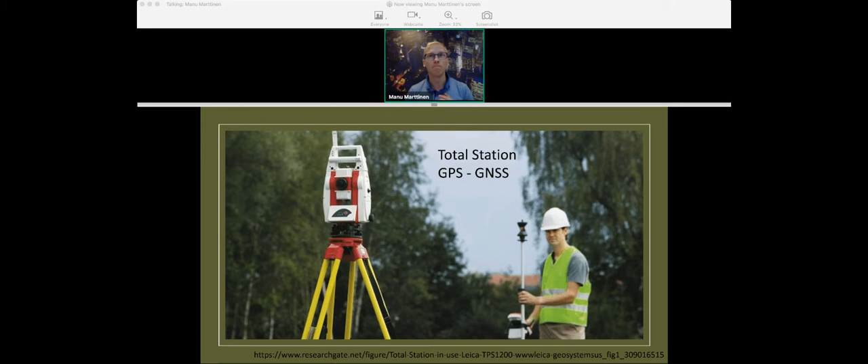But then they noticed that, hey, we have to walk a lot. Previously, the assistant guy like me was walking and they were just standing by and watching with the binoculars. But now they had to walk a lot. So they thought, wouldn't this be possible to do some other way? Maybe not all measurements, but some of them, especially those where you have to travel long distances.

So then we come to drones and how you can use the drone, orthophotos, 360 photos, and what kind of measurements you can do with drone technology on your infra construction site. And that is our topic today: Infrakit and drone with 360 photos in a highway project.

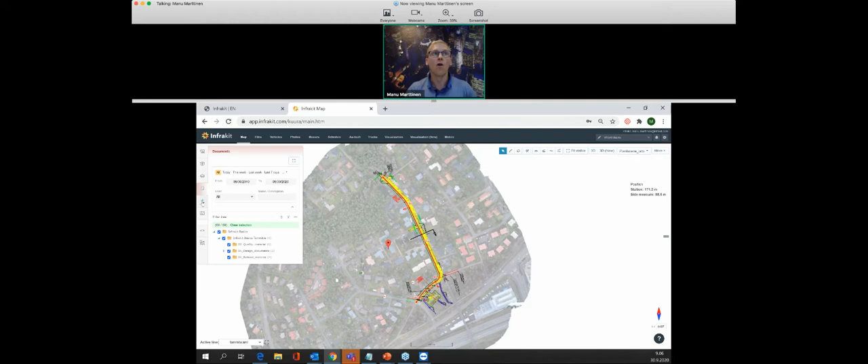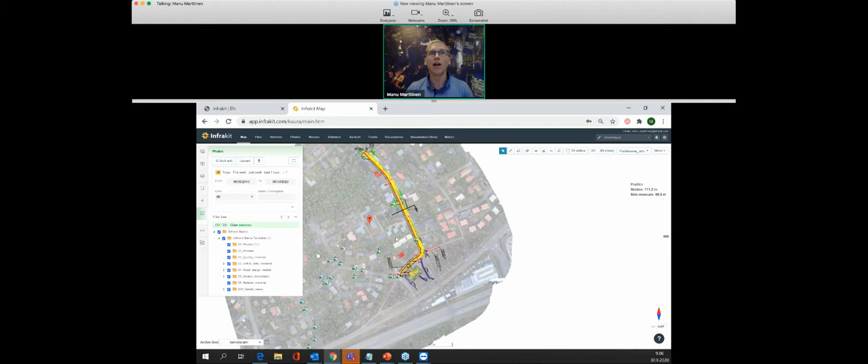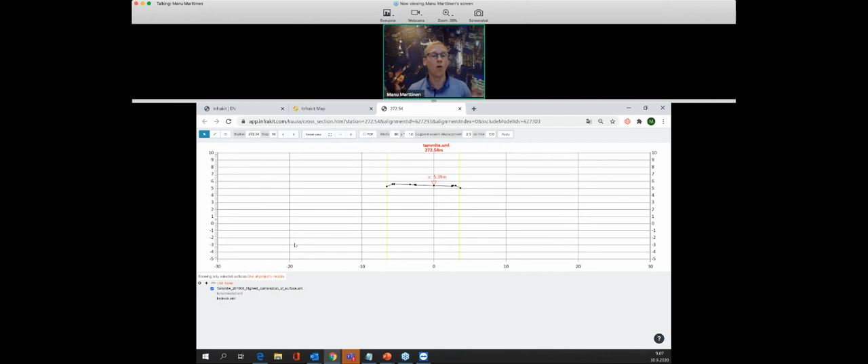And of course, you can see there all the documents that have been imported to your project, all the as-built points, and all the images. So basically, you can handle all material related to your infra project in Infrakit. And if you need, for example, to take a cross-section, you can draw it anywhere related to your alignment, or if you don't have an alignment, anywhere you want. And you can also do some measurements from the cross-section, for example this excavation depth and height.

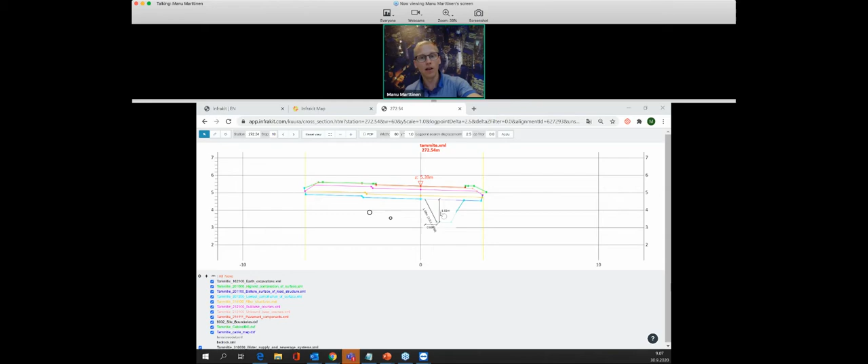And that's not all; the related information is also in your tablet computer. You can use it with your mobile devices, with your phone, or with your tablet, and set there all the needed information as well. For example, here I put one highest combination of model and one alignment, and I can take the cross-section here as well. All the information you need to do your infra construction business is in your pocket with your tablet computer. So that's Infrakit in a nutshell.

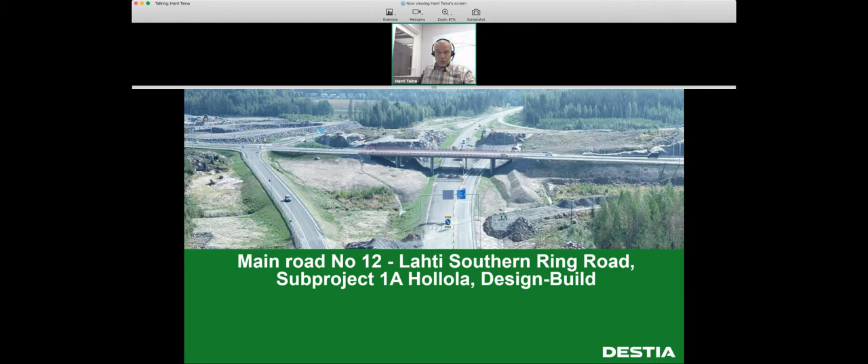So here you can see the old road. If you go to, for example, Jyväskylä or Kouvola or Lappeenranta, you are going this road now, but after it will be opened somewhere at the beginning of December maybe. So this is our part starting from Soramäki Interchange, and it ends here a little bit after Okeroinen Interchange.

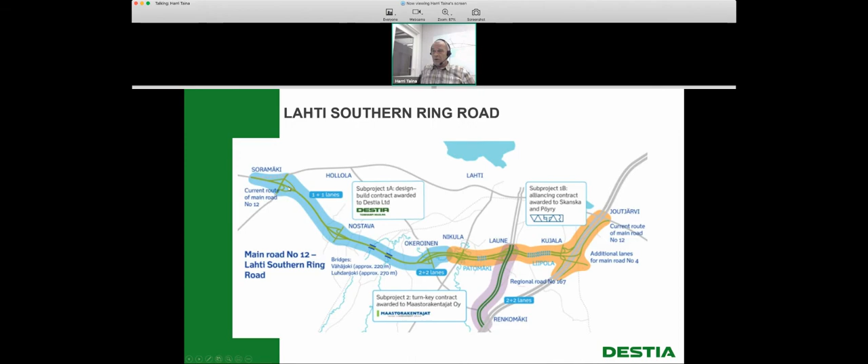And this part, they are with Skanska and Pöyry, and they have an alliance contract. And our part is ready now, but they are still fixing some things. So after they have finished in the beginning of December, we can get the traffic to the new road there. And then our part here, you can see these are the 3 interchanges we built.

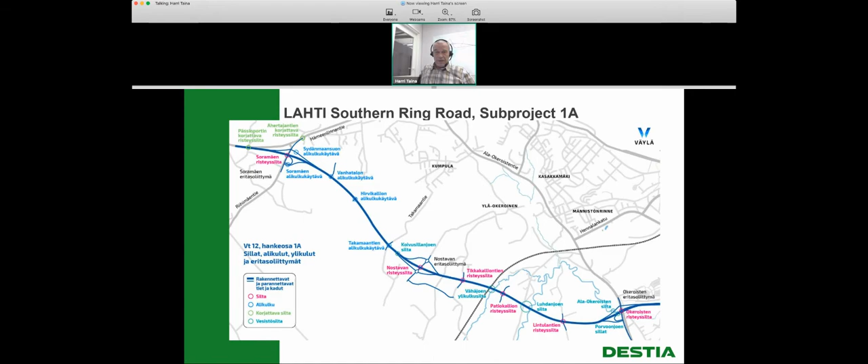And then there are these 2, Bridge Vähäjoki and Bridge Luhdanjoki, that were the biggest or longest bridges we built. And some background. So the client is the Finnish Transport Infrastructure Agency, and part of the costs go to the city of Lahti and Hollola. They are paying some quarter of the costs, and we started the actual construction at the beginning of April, and

now we finished. It was about 2 or 3 weeks ago when we finished the building, so it was quite well in the schedule. And here are some numbers of the project. So it's a little bit under 9 kilometers, and the last kilometer is 2 + 1. So it's a motorway, motorway 2 lanes there, and then the 3 new interchanges and 18 new bridges.

And the biggest bridges were Vähäjoki S7, 230 meters, and S9 Luhdanjoki, 280 meters. And here are some numbers from the beginning of the building of the project. There were quite a lot of pile slabs also at the end of the roads in the Okeroinen Interchange, and about 100 kilometers of piles we had to put in the ground.

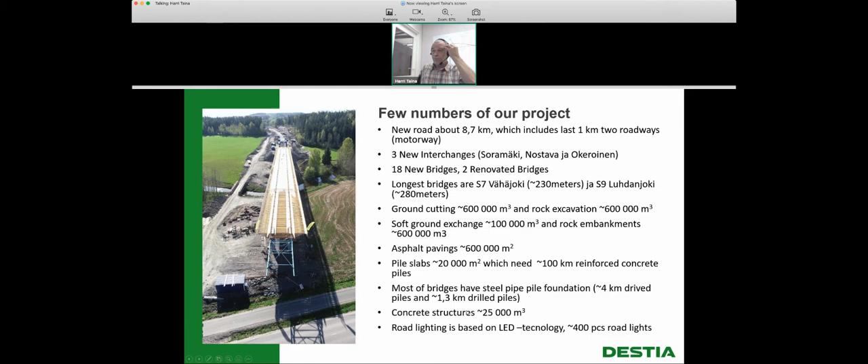And then here you can see the ground as it looks. It's a little bit under Lahti, but as you can see, there are quite big hills and also valleys here. So the gray area is the rock cutting area, and it was about 30 meters high. And then there was this valley, I think the pillars were 25 meters and the piles were almost 45-50 meters high.

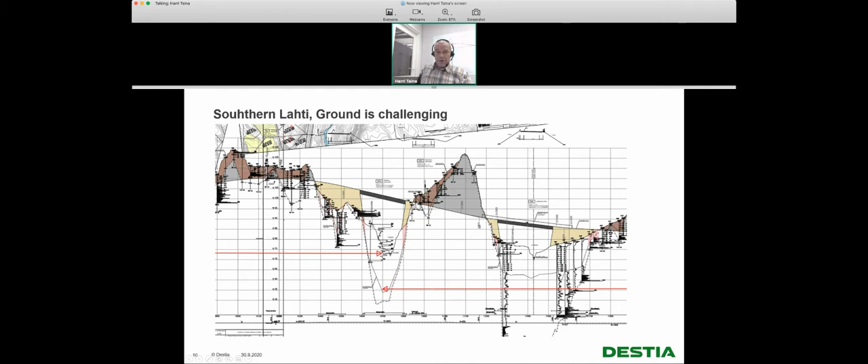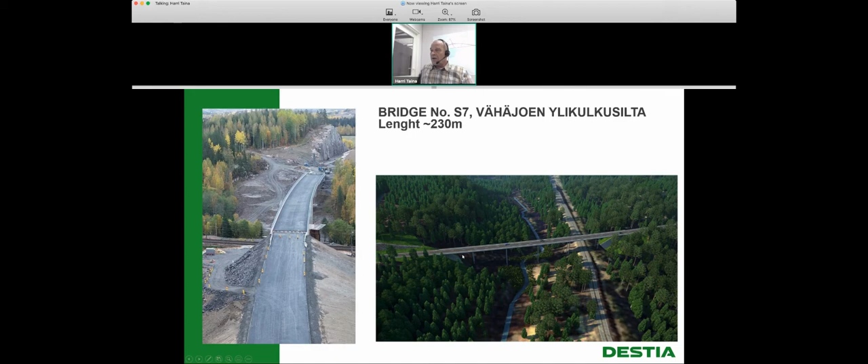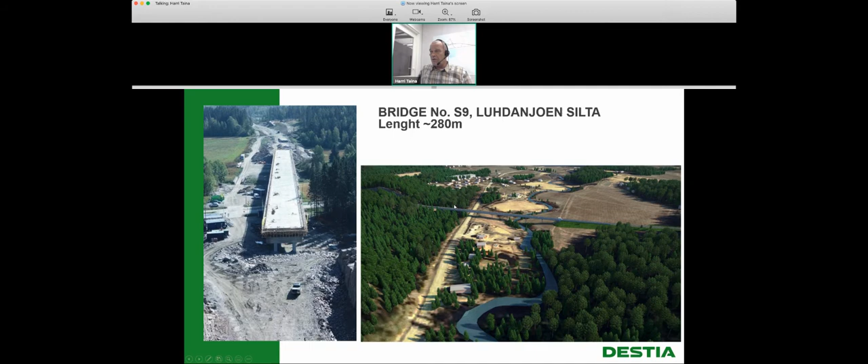And these are the two biggest bridges, S7 and S9. This one leaves almost straight from the rock cutting, and it goes over the main road there. You can see there's a picture, this is number 7. It crosses a small river here, and then the railroad, and then there's number 9. There's an existing road here, and then the small river. This was the biggest bridge we built.

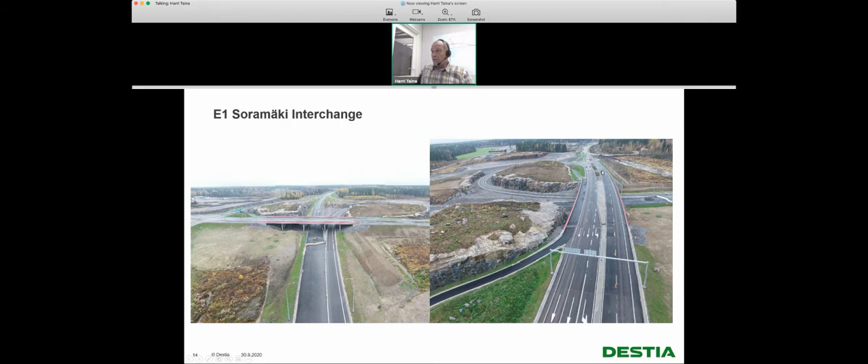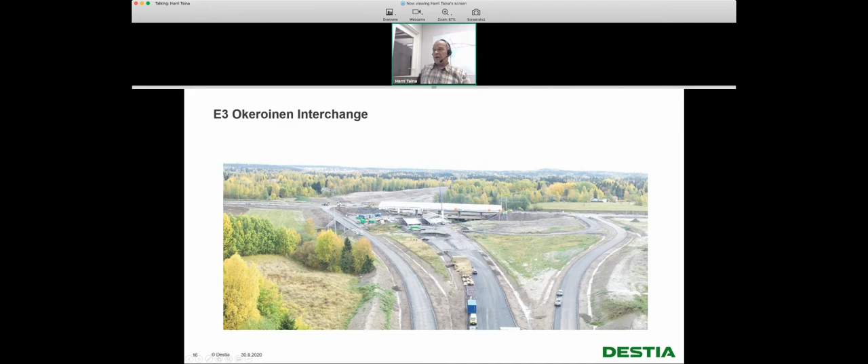And this one is from number 9, and then some pictures. Soramäki Interchange here, it's already finished when these pictures were taken, and the Nostava Interchange still building the bridge there, and then Okeroinen Interchange, there's also bridge building going on. And this is the Okeroinen part. So there are a lot of piles put in the ground.

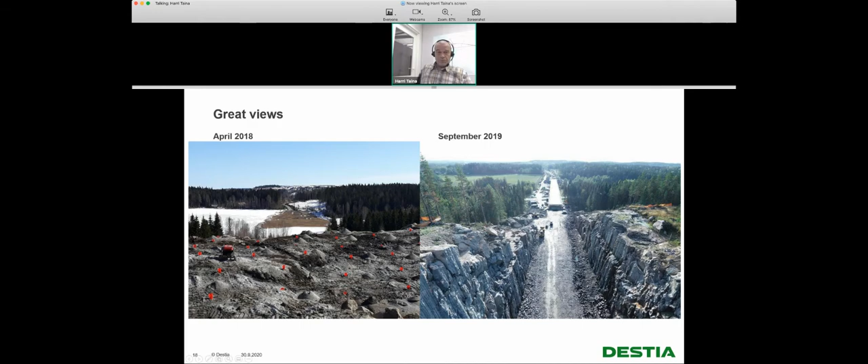Some views, this is the biggest hill here, and this is bridge number 9. So almost from the hill of the rock, we have to go to the bridge. Okay, and that was about the slides.

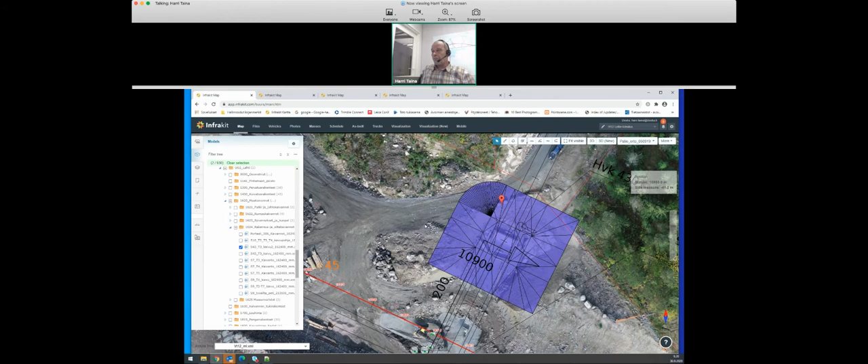So I flew this area when we started to build this, and then we realized that we had to fix this so that we could build this lane here. You can see the old road goes from here and continues here. We had to make a little curve here so that we could build the bridge, and there it connects to the old road. And now the traffic goes here, so you can see that we moved it a little bit so that this lane was possible to build.

So when we take the traffic to this lane, we could start digging the old road away. But then when we built it, we realized that we also have to make these stone lines here, so that when we take the traffic to this lane, there won't be room anymore to build this one.

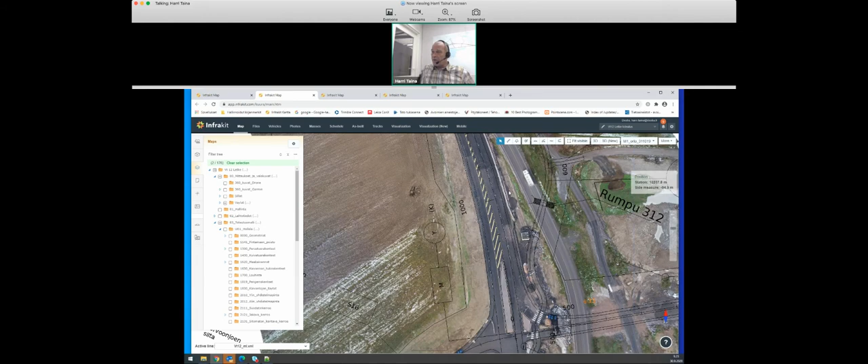And for the northern part also, you can see here how we could plan the traffic. So here it connects, the new road connects to the old road here. This was taken in August, and the second one I placed here was 2.5 months later, and it's already done. In August there was still, the bridge was under construction and nothing had been finished yet, but 2.5 months later it looked like this.

And then there's when we dug this old road away, you can see that this was taken some month ago. The existing situation or present situation here, you can see that now the grass is growing here, you can't even tell where the old road went.

You can see it from this one. So it went from this alignment here, and now it looks like this. So it fits quite well to the ground or the environment.

And then there's also, you can see here, I have the ground control points.

This area here, these are the plans that I used. This is usually one flight here, and there's another here that connects to this one. For every flight I used to build 2 or 3 ground control points.

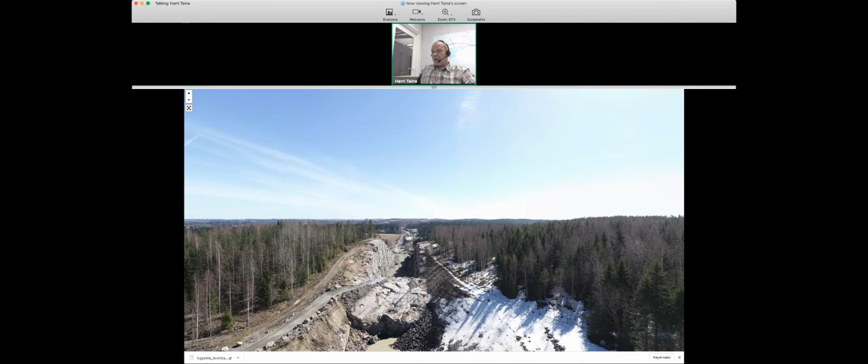These are quite useful because the designers have liked these a lot, because they are not on our side, they are working somewhere else, maybe Helsinki or Tampere, but they can check from here whether something has been done or not. So this is the place that I showed earlier.

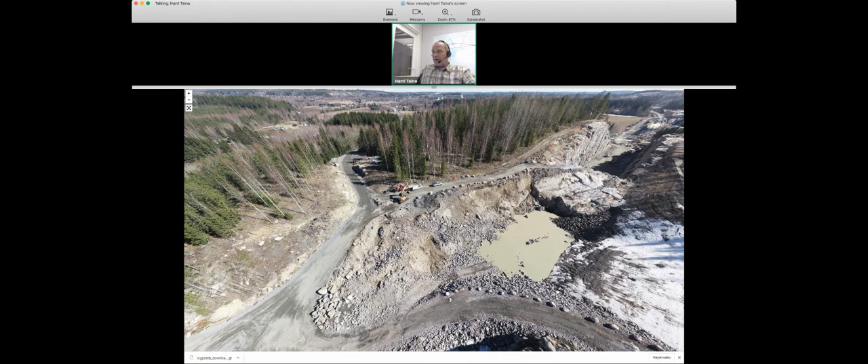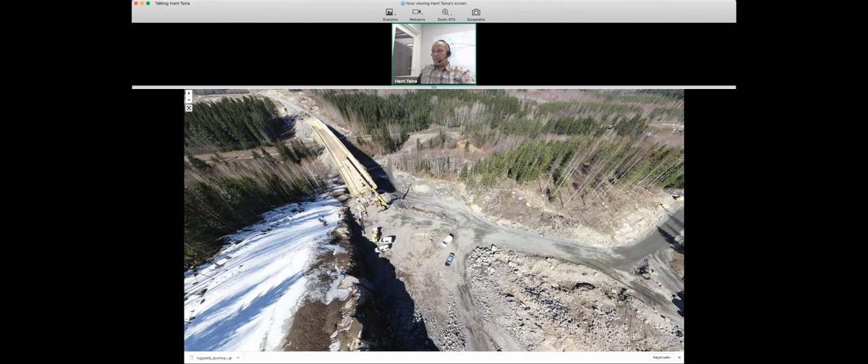From the 360 photo, you can see the shapes and the height of the ground much better than from the orthophoto. Of course you can't measure anything from here, but you get a much better view of the site. So this was the place, and this also works as a diary, because if you take them every 2 weeks, you can check whether something was done or not.

I will show you, this was the first one. Then after 2 months from the same place, you can see that some digging had been done here. But here the rock is still in its place, so they haven't done anything for that part yet.

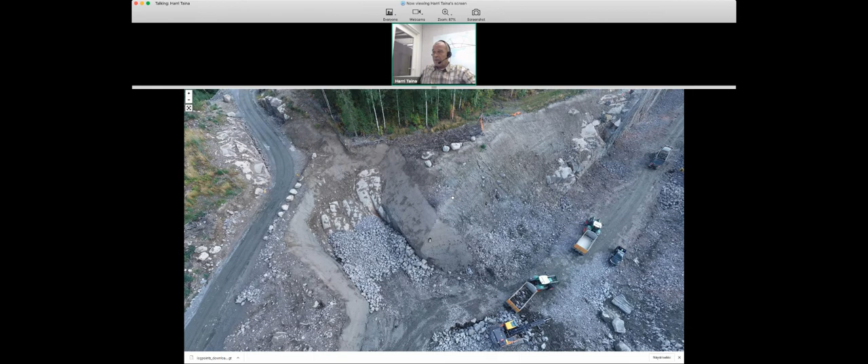And then it was in August, there. Now you can see that there's already kind of a bed for the footing here, and they have blasted the rock from here and started digging it away.

Then it was in August. Then I will show you September, and there you can see the slope that I mentioned earlier. It was the 11th, this one. Now you can get a better view of the slope here.

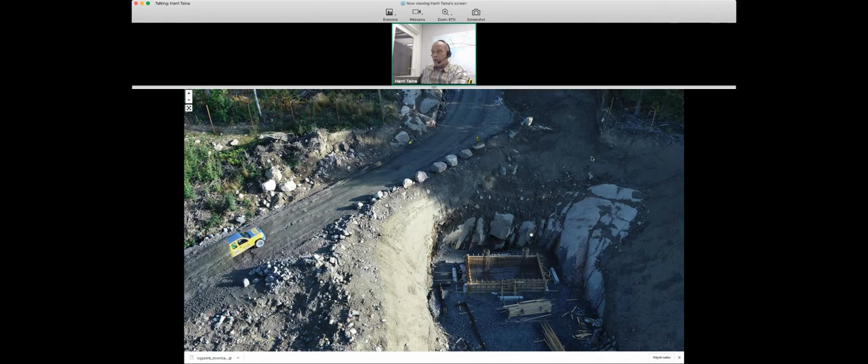So this is the old road, and this is quite steep. You can also see half a car going up the hill. And here you can see the other footing. They have dug the rocks away, and the first footing comes to this shelf here.

It was on September. Then I have one picture I will show from January here, and there they have started to build the top of the bridge, as you can see here. This was taken in January, and there was no snow then, so the winter was quite good for building, but not for skiing.

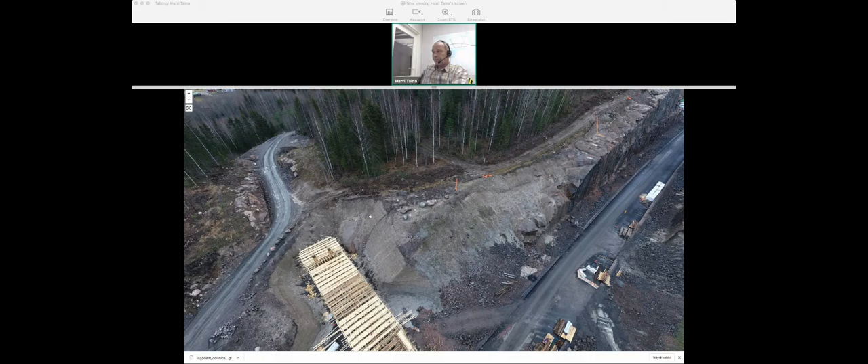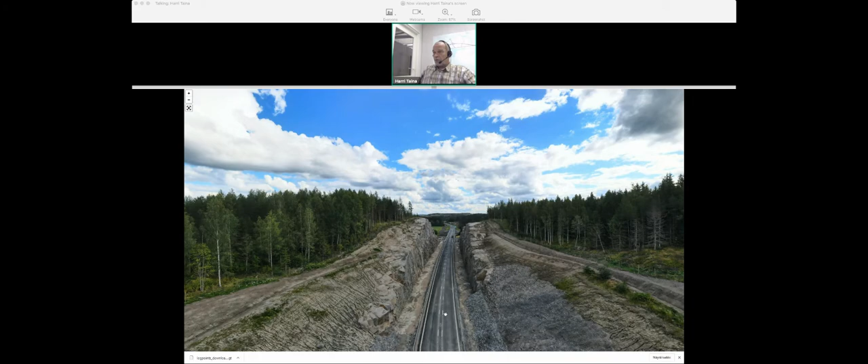Then the last picture here was taken about a month ago, so it's almost nearly done. You can see some cable, but I think this is a loose cable there.

Then the railings, there's still a little bit to be fixed on the bridge railing here, and also on the other side there was some part of the railing missing. Number 7 is already done there, and there you can see number 9 and the high hill that we cut.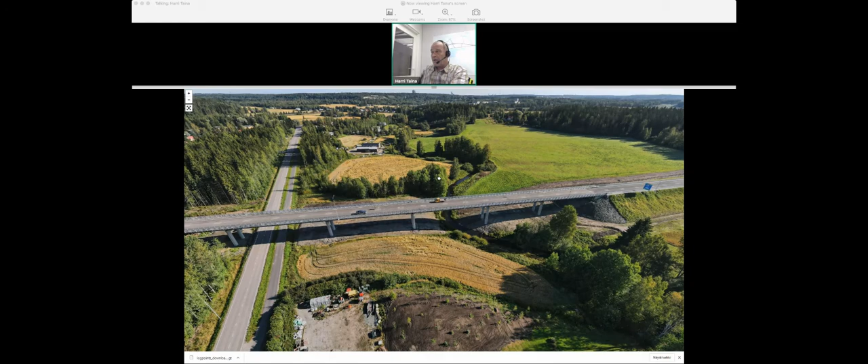Then there was another picture from number 9 here. This one, nice weather and beautiful views. See, this is the high hill, Patiokallio. And then the last picture I will show, this was quite funny.

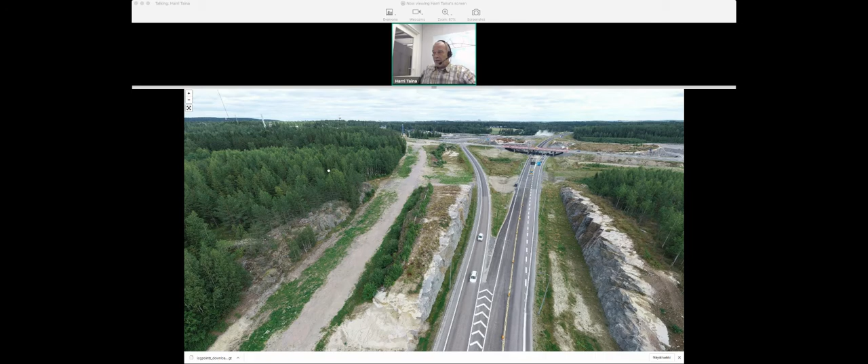When the software stitched these pictures, this is the result. There's an excavator doing the noise barrier in Soramäki. This is the Soramäki Interchange, and this is our special excavator designed for the noise barriers. As you can see, it seems that there's two buckets here.

I said to the driver that he should fix a third bucket to the middle so that he could do the top of the noise barrier. It would be much more quicker.

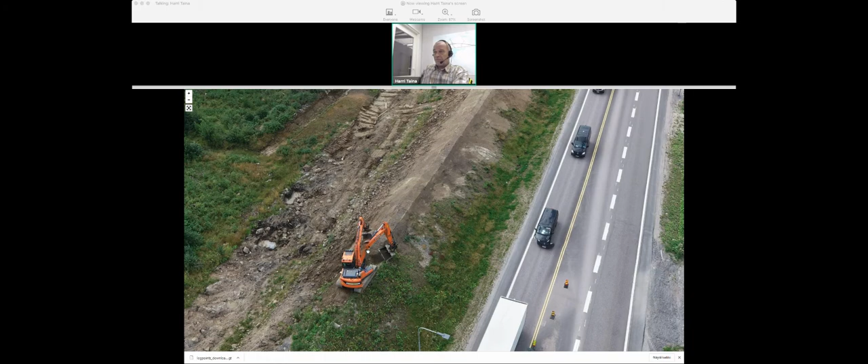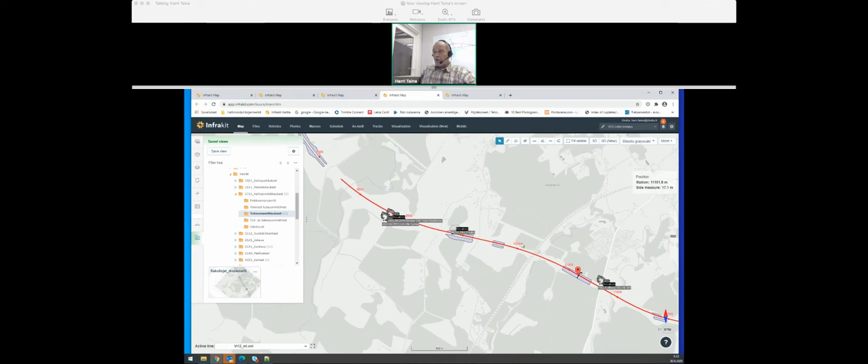And then a quick view of the point clouds also. So for the rock cuttings, I took the point clouds. You can see the model here. So it's a triangle mesh, and I'm not sure how quickly it loads here, but okay, here you can see the triangle mesh.

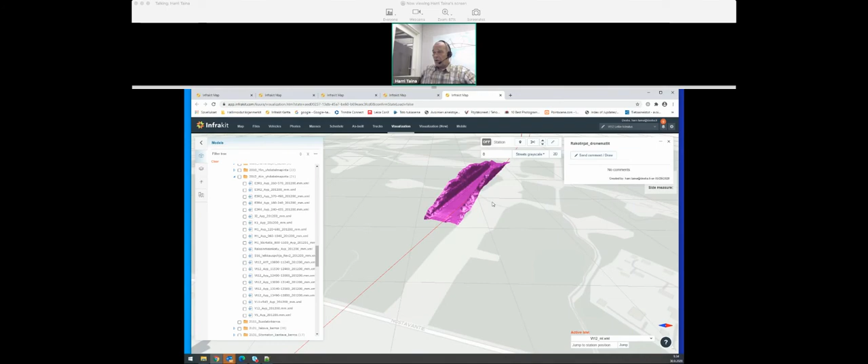And from the 3D view, I saved them as views here, and then I opened them with 3D Map. They are already here. This is the high hill in Patiokallio, so it looks quite good.

And with this is as-built. You can see it was cut in two levels. You can see the edge here, and I can show you the plan how it should have been.

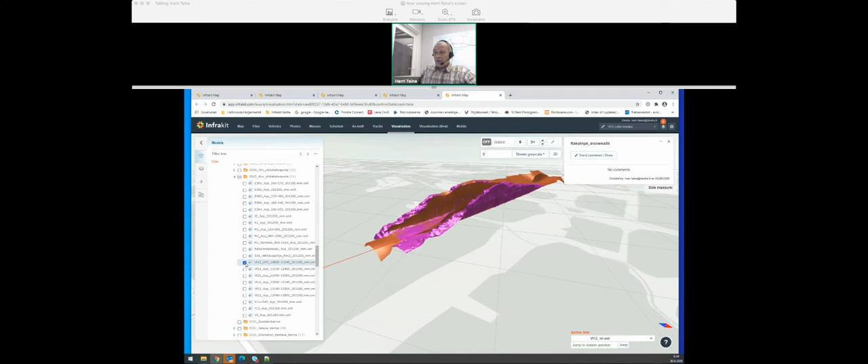Okay, it came with the same color. Now it's with different color. Here maybe some brighter - the purple one is the as-built, and the green is how it should have been built.

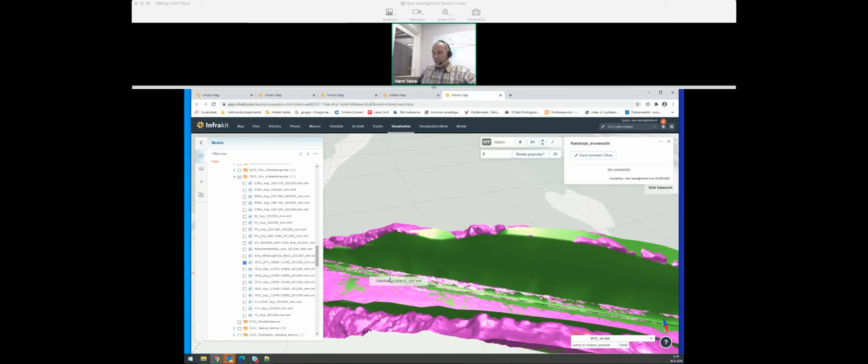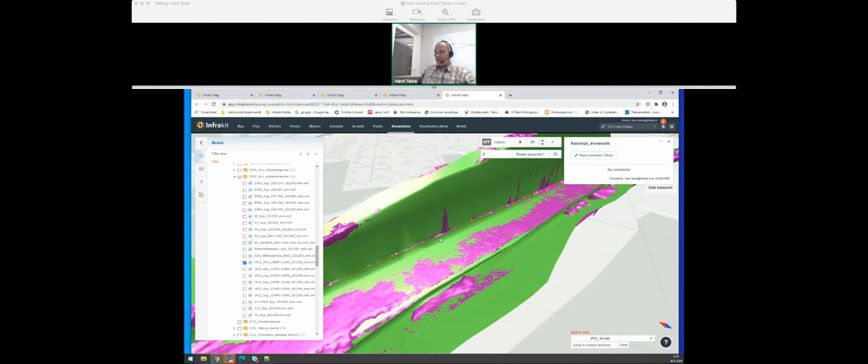So you can see that here you can see some purple color, so we have to dig the ditches a little bit deeper. Here, and on this side you can see some parts - this one, because this as-built model, you can see it through the plan. So this place or area here wasn't wide enough, but it was so small that you can maybe see it better here. Here you can see the as-built model, and this is how it was planned.

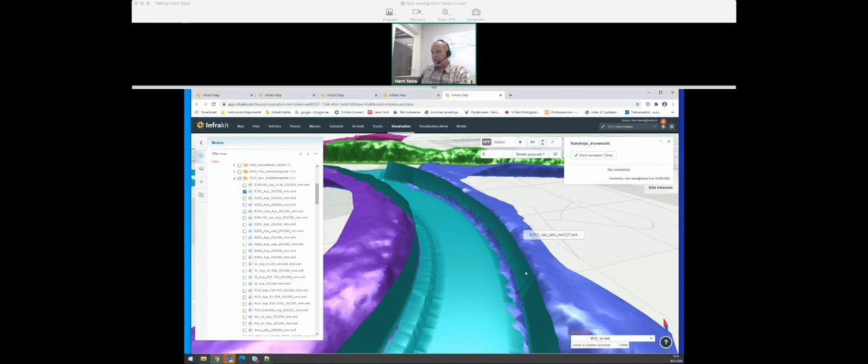Then maybe a last view from the Soramäki, where we had a little bit more rock cutting. Here you can see these models. For these you can also take, for example, the first ramp - this one here. So here you can see the ditches - we have to dig them deeper.

Yeah, I think that was about it. I think it went a little bit over time, but not much. Thank you.

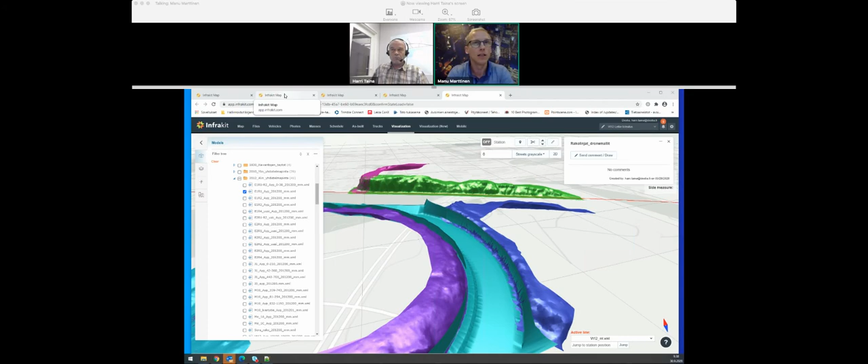Maybe, for example, in some project we also had to show that the paintings here were in the right place, and all the lanes, that the width of the lane was as it should have been planned. But now I have the plan here somewhere where I can show the paintings, and then the client could compare it on top of the orthophoto. So we didn't have to measure the paintings at all.

Yeah, and a question related to that - how did it go with the customer? Did you start the communication that hey, we could do it this way, or was it the client's proposal, and how often did you deal with the client when you were showing the orthophotos and measurements? Was it daily or monthly?

I think that it was almost daily, because we had the access to the client - they could also come to Infrakit and check the orthophotos. And this compilation here, it has all the latest orthophotos. We use a cloud service called Pointscene, and we place the orthophotos there, so I have the latest orthophotos from every area already there. So they can check it almost daily.

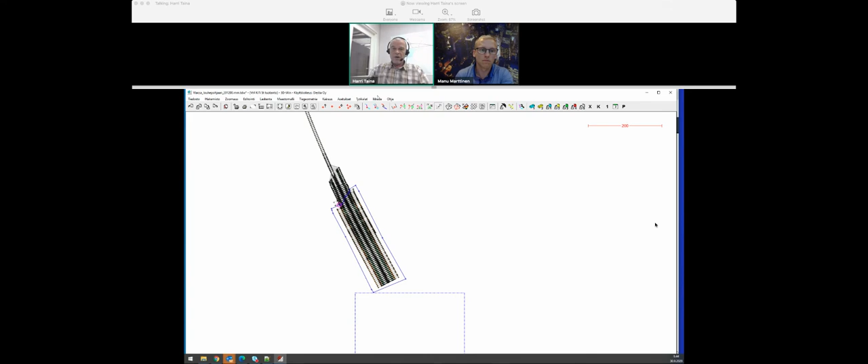As you saw, we had 2 other hills there, and at first I thought that we would need 3 base stations, but we could place them so that we only had two base stations, and I think that when we flew the Soramäki interchange, the gap between base stations was somewhere 6 to 7 kilometers, and it went quite well. And then when you place the ground control points there, you can also check whether you have to move the model or the point clouds a little bit if they don't fit the ground control points.

Yeah. Then there is a thank you. And then there is one more technical question. I didn't quite get if you answered that, so I will take it again. What about the triangle mesh? How did you make the triangle mesh from the point cloud? What was the software there?

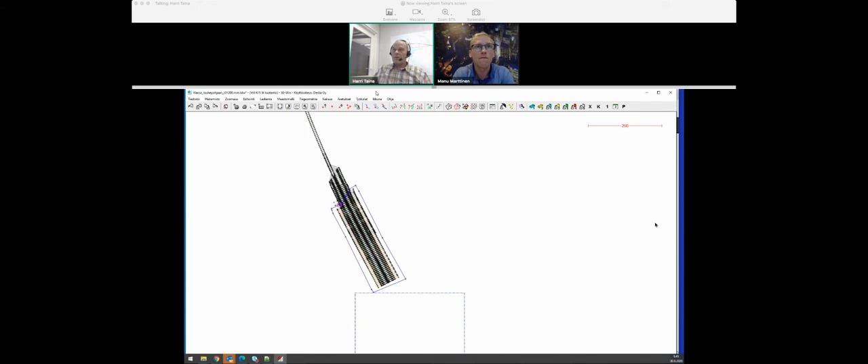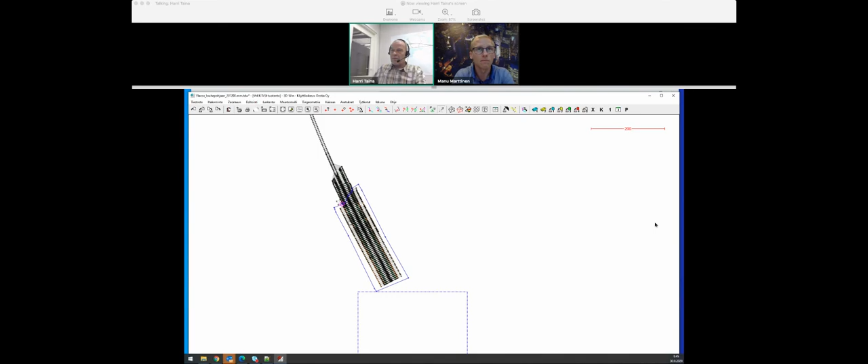You can use whatever software you want, but we are using 3D Win. So yeah, I brought the points to 3D Win, and then there's this one where you can do the triangle mesh. For example, here I have one triangle mesh that I have done. You can see it at the bottom of the cutting here. And then I just uploaded this triangle mesh to Infrakit.

Yeah, for the audience's interest, 3D Win is a commonly used land surveyors' program here in Finland. I think everybody is using it. What do you think? Yeah, in Finland, yeah. Because it's the best software. They should use it in Europe anyway. Yeah, it would be nice.